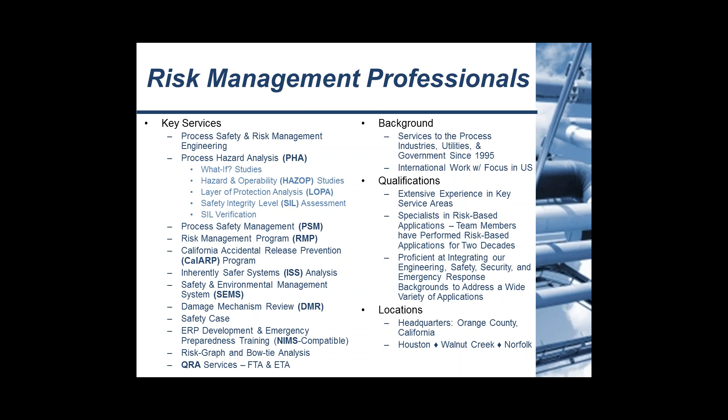Today's webinar will be focused on CalARP, RMP, and PSM common deficiencies and tips. RMP and PSM, as you know, are risk management plans and process safety management programs. CalARP is an example of a state accidental release prevention program, the one that's required in California. Our main presenters are going to be Colin Scholtz and Jordan Schultz, and they will be providing a lot of background and specific tips. So let me introduce the speakers a bit.

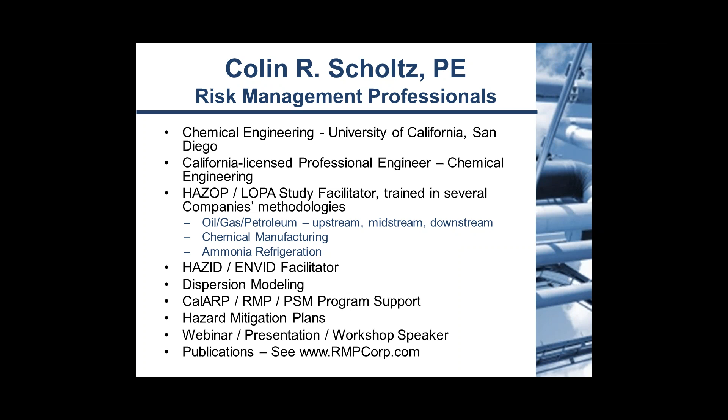Colin's a chemical engineer, licensed professional engineer in chemical engineering in California. He's got a lot of experience with HAZOP and LOPA facilitation on a wide variety of facilities, and has done dispersion modeling as well as many of the other elements of these safety management systems programs. For publications, just see our website. Colin has joined me at the Global Congress on Process Safety before, and has written numerous papers, and one of the ones on operating procedures is downloadable if desired.

Jordan is also a chemical engineer, has experience facilitating HAZOP and LOPA studies for a wide variety of facilities, also has background in dispersion modeling and the other program elements of CalARP, RMP, and PSM. Also has done a number of publications, and those can also be downloaded from our website.

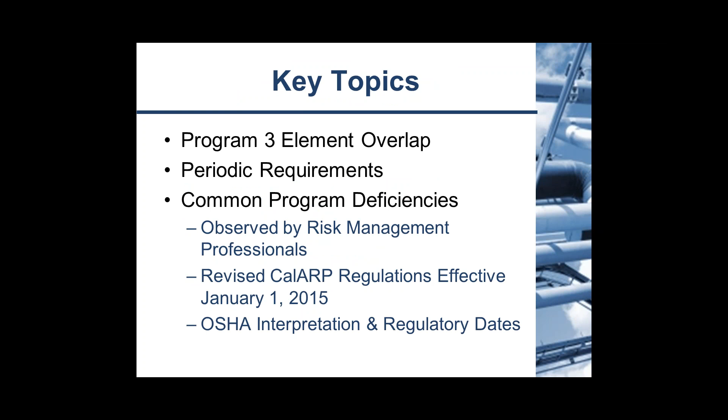So without further ado, I'd like to introduce the topics. We'll start with the overlap of the different programs, periodic requirements, and then launch into various program deficiencies, things that you want to watch out for, things that trip up a lot of folks, things that we've observed, and also things that are changing with the new regulations and some OSHA interpretations that have come out. So at this point, I'd like to turn it over to our first speaker, Colin Scholtz, and he'll start talking about program overlap.

Thank you, Steve. How's my audio coming through? All right, good morning, everyone.

As Steve mentioned, we're going to quickly start out with some of the prevention program overlap. Just a quick overview on that, and then we'll dive into the meat of our discussion this morning regarding common deficiencies of the programs that Risk Management Professionals has seen. Jordan and I will both be speaking on that, so we'll switch about halfway through.

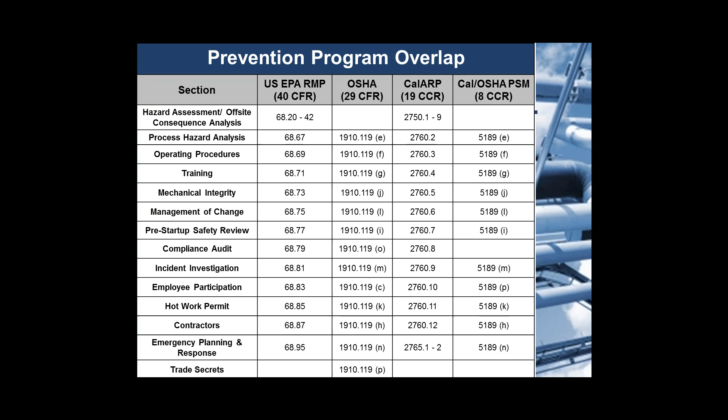And just moving on into the periodic requirements. These programs are living, breathing programs. Facilities have to do a lot of ongoing things in order to comply with the regulations, but there are a couple milestones that we want to call out specifically. There's an annual review and update of operating procedures. We'll talk more about that when we talk about the common deficiencies that we see with operating procedures, but in summary, a facility's procedures have to be reviewed and certified to be accurate every year.

Moving on to the 3-year cycle, we have refresher training for employees and compliance audits. And compliance audits are not the same thing as a regulatory inspection. This is a formal audit done on the facility and its implementation of its CalARP or RMP or PSM program. Something important to note is that this does not have to be an external audit. It can be an internal audit by someone within your organization. The key point there is just to ensure that it's someone who's qualified to perform the audit, and that they don't have any major conflicts of interest on that.

On the 5-year cycle, we have the CalARP and RMP submittal. Every 5 years, at least every 5 years, facilities are required to submit some information, including a summary of their prevention programs and a couple other things to the administering agency or the EPA for CalARP and RMP. OSHA does not have a submittal requirement currently. This is, again, just for EPA and the state of California.

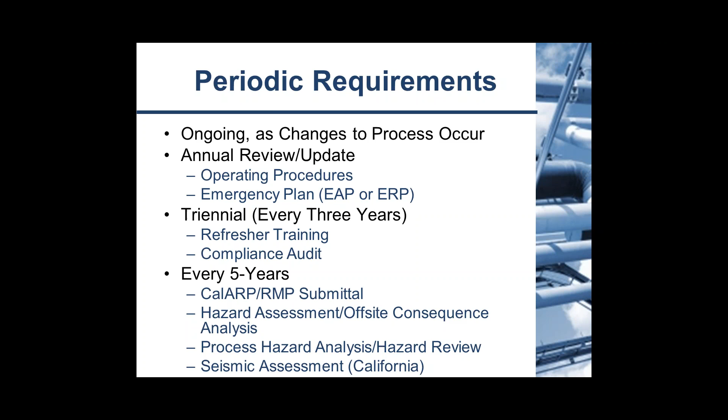Okay, as Steve mentioned in the beginning, we're going to dive into the program deficiencies, and these are mainly observed by us when we conduct compliance audits on facilities or when we're just interfacing with counterparts in industry, working on general program support or PHAs or development of procedures, etc. And it also comes from interfacing with regulatory agencies, either from being on site during inspections or just general discourse as we try and figure out the best way to comply with these regulations.

We're also going to tangentially touch upon some of the new CalARP regulations that went into effect January 1st of this year. In case you guys didn't know that, give us a call afterwards, but yes, the CalARP regulations did change slightly. So we're going to talk about a couple of those minor issues as part of this presentation. However, for more detailed information, you can refer to our website. We have a previous webinar on those changes, and you can also, again, give us a call.

So we're going to start out with the submittal element. Again, this is required to be done at least every 5 years. That's a long time, and I can't tell you, it happens a lot where facilities call us and have their submittal due in a week or two, and it's not impossible to meet that deadline. However, we do want to stress that facilities have 5 years to meet this deadline, and so we really suggest that you allocate your resources accordingly and set up a timeline in order to complete that on time.

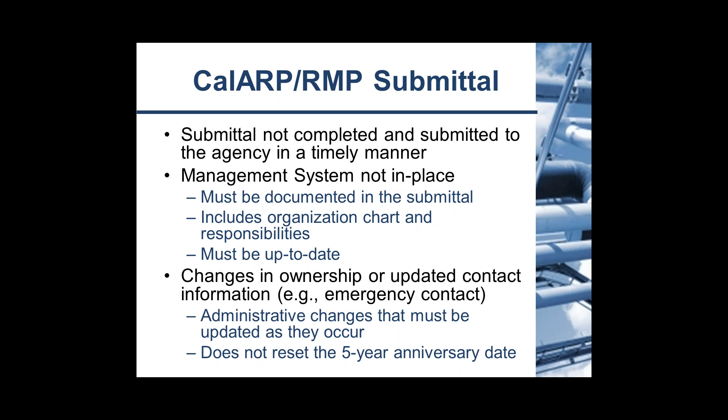It's happened a decent amount of times when we go in to do a 5-year update and are reviewing the facility's emergency contact information on file with the EPA or the AA, and the emergency contact information might be 2 years out of date. And as a heads up, if you're in that situation, you are currently not in compliance with the regulations and are open to potential citations there.

So the hazard assessment, again, is solely a CalARP and RMP portion. It's not an OSHA requirement. And it's comprised of the off-site consequence analysis, or OCA, which is the worst case and alternative release scenarios. And it also includes the 5-year accident history element. Most of the facilities that we deal with have not had any CalARP or RMP applicable releases, so as a result, the hazard assessment is often referred to as the OCA.

The big issues that we see here are lack of clear documentation on the scenarios and how facilities came to those calculations for calculating the distance to endpoint or the quantity released. The more documentation you can have here, the better, just outlining your thought process and how facilities came to that information. On the revalidation side, this has to be updated at least every 5 years. And we have seen some facilities that are static and do not change a lot.

And so in 2010, they did some modeling where they used their largest storage vessel, calculated a radius of impact for that worst case release scenario using RMP Comp, and then plugged that value into some sort of population receptor program like MARPLOT, for example, and came up with a population for that. And then in 2015, when it's time to revalidate it, we've seen facilities just take a look at the calculations, see that nothing has changed in the process, and therefore rubber stamp it and say it's good to go.

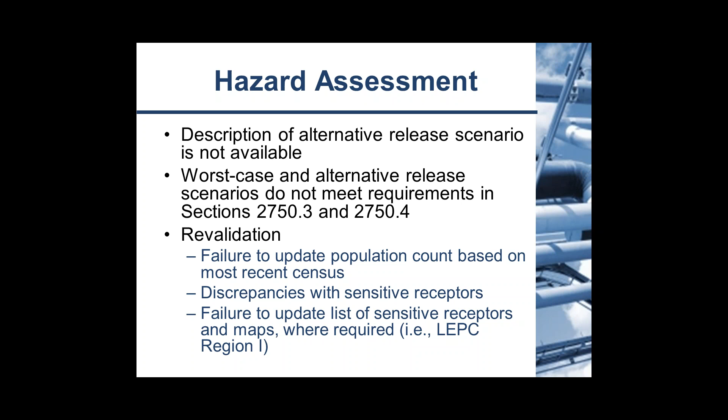The process safety information, this is a very comprehensive set of documentation on a lot of the core technical information at your facility. This includes things like your P&IDs, the codes and standards the facility was designed and built to, design basis for the relief system, specification sheets on components and equipment and valves, etc., instrumentation. And the issue that we see a lot is most facilities are not static. Static facilities are ones who construct their facility and then nothing ever changes. These are generally simpler processes and don't have a lot going on.

However, for more complex processes or those facilities that work in dynamic environments where changes are constantly being made, optimization is performed, etc., those should all trigger MOCs, which then have to ensure that your PSI is updated. And we really see a lot of facilities that struggle with keeping their PSI updated based on the changes that happen out in the field. And the regulations require that your PSI accurately reflect what's out in the field.

And some examples would be like if a facility does an MOC to change some piping configuration or add a vessel or something like that, then if they do a good job on their MOC, they might attach the supporting information like redlined P&IDs or revised operating procedures to their MOC log, but a lot of times that information never makes it back into the master or controlled PSI.

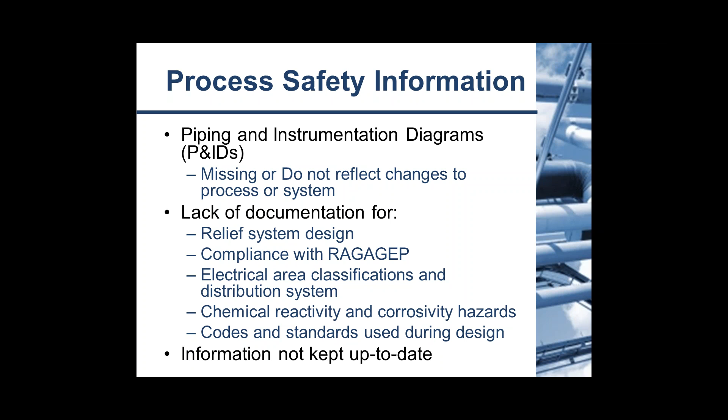And even though this could be true for chemicals, the SDS doesn't address corrosivity because the chemical is not corrosive. If it doesn't say that anywhere, a regulator is going to have their eyebrows raised because you're not documenting that you've thought about it and that you've looked into it. And as you'll see, which is a common thread in this, you don't document something and there's no proof that you've actually considered it or done it.

Moving on to the PHA, again, this is done at least every 5 years unless some major changes trigger an update. We'll start right out. The regulations are clear in defining that personnel with knowledge and experience in engineering and operations must be present, and also someone with knowledge in the specific methodology being used. There have been instances where PHAs are conducted only with design engineers present, and the potential issue with that is there's no one with an operations background, and so that's potentially a violation of the regulation for an operating facility.

Also, the PHA team not documented. We've seen a handful of PHA reports that look very good, but they don't document the team that was present. And so without having that documentation, there's no way to know if there was someone with experience in engineering and operations present, which potentially opens up facilities to some issues.

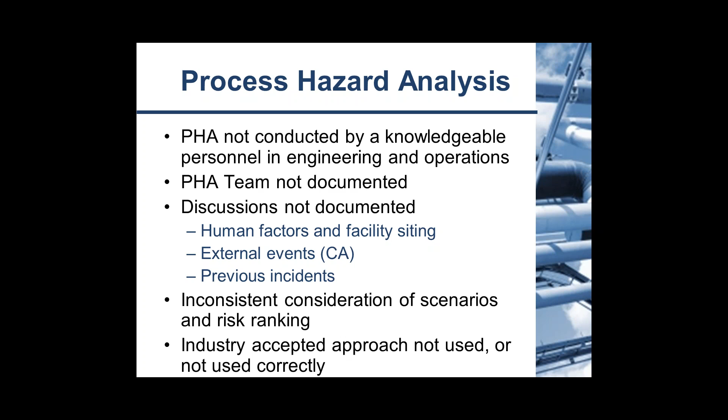However, the big item that I want to touch upon for PHAs is recommendations not closed in a timely manner. You'll see this in bold and in red, and you'll see a couple of these throughout the presentation this morning, and you'll definitely realize that it's repeated for a purpose. This is a very big ticket item that auditors love to come in and look at whenever they get to the PHA. First thing they ask for is always, what's the status of recommendations from the last one?

A change from the 2015 CalARP amendments is they now specify a time frame that recommendations have to be completed, which is within 2.5 years or during the next turnaround. You can deviate from that if you have an agreed upon timeline with the AA, but again, that has to be documented. A number of times when we come in and do 5-year revalidations on PHAs, we'll look at the recommendations made during the last PHA, and a decent amount of time we start asking questions. Was this recommendation done? What documentation do you have on it? And a lot of times the answer is no.

We end up having to close those recommendations on site as part of our PHA. Technically, facilities that are in that situation are deficient because they're not addressing their recommendations in a timely manner. The whole point of making a recommendation in a PHA is to close some sort of safety gap. So if you're not doing that, A, you're opening yourself up to regulatory citations, and then B, you are defeating the purpose of doing a PHA and making recommendations in the first place.

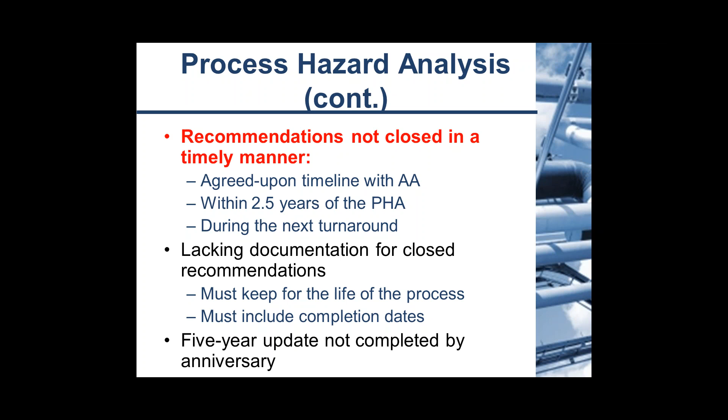Secondly, and I know Jordan's going to talk a little bit more about this, is lacking documentation for closed recommendations. It's not enough to do a recommendation and just be done with it in the field. You have to have documentation showing so-and-so completed this recommendation. This is how they completed that recommendation. It was signed off on this date. Again, as I mentioned earlier, if you don't document it, then there's no proof that it ever happened.

Operating procedures. As I mentioned in the beginning, operating procedures for Program 3 and PSM facilities have a requirement for an annual review and certification to be performed. Again, this is another big thing that auditors love to come in, and as soon as they get to the operating procedures element, they'll ask the facility, show me your annual certification for the past several years. And that's something very easy for an auditor to come upon, and if it hasn't been done for a year or two, then that's a potential citation right there.

Another item that we want to point out is phases of operation not listed. The regulations are specific in requiring that the operating procedures address different modes of operation, such as normal startup, normal shutdown, normal operations, temporary operations, etc. A lot of small facilities don't have any temporary operations, so they just kind of leave that blank.

But that kind of raises the eyebrow of an auditor, because it's not documented that we thought about it. Do we have temporary operations? No, we don't. It's okay to put there are no temporary operations for this process. Really what auditors are looking for is to ensure that facilities have reviewed all the different modes of operation and have thought about them and assigned procedures to fit those.

And the last big thing that I want to touch upon here is operating limits and consequences of deviation. Operating limits are kind of tied back to the PSI. This information typically includes safe process parameters for the process to operate in. So that would be things like pressure, temperature, flow, etc. The operating procedures have to address consequences of deviation if that process deviates from those operating limits.

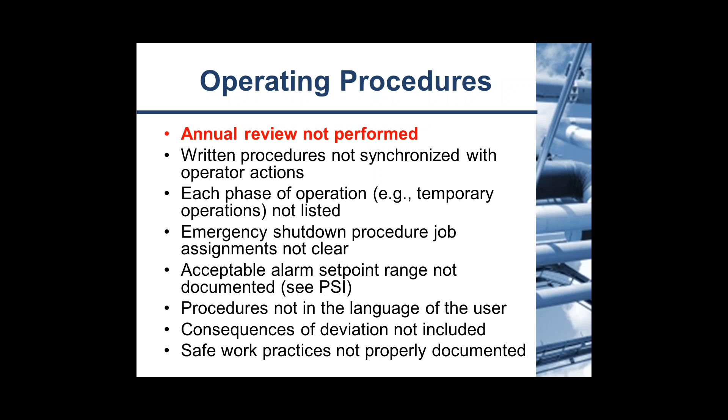I'm going to wrap up my portion this morning with a quick discussion on training. The regulations are clear that initial training has to be provided to every employee that works on or near the covered process, and that refresher training must be completed at least every 3 years. A lot of facilities do refresher training more often than 3 years, but again, the requirement is just 3 years.

The one thing that we see a lot of is just poor documentation on training, which we understand is difficult for facilities, because there's a number of different trainings that go on at facilities that's not specific to CalARP and RMP and PSM. There's a lot of other stuff that they have to maintain records on.

However, the regulations are explicit in the documentation that's required for this training, and that's things like the name of the employee being trained, the name of the trainer, the date the training took place, and most importantly, the means used to verify that the employee understood the training. A lot of times that last item is left out, and we just see training records saying so-and-so was trained by this trainer on this date.

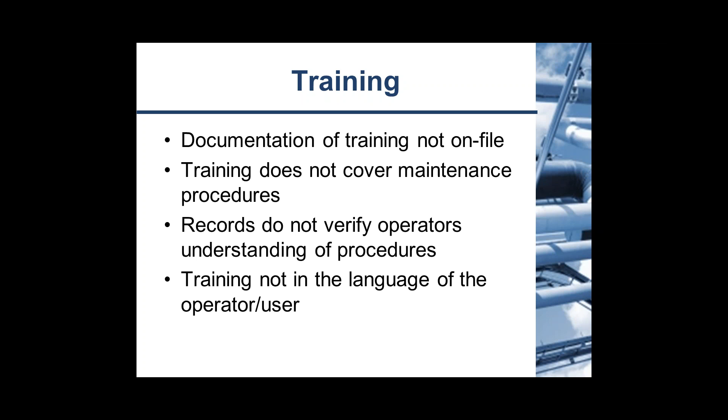And the problem then there is that it doesn't show how the trainer was able to validate that the employee understood the training. This could be things like written tests or oral exams or just demonstrations showing that the employee is able to demonstrate to the trainer that he or she understood the training. However, again, you have to document it. Documentation is the key here.

So with that, I'm going to turn it over to Jordan to continue on.

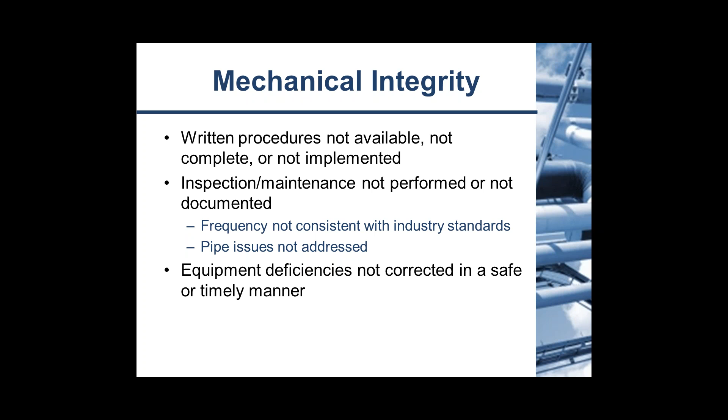Piping issues are also oftentimes not addressed. Making sure that you're looking at wall thickness, like Colin had talked about earlier, in both vessels and piping is very fundamental in making sure that you maintain the integrity of your system. And as part of these inspections, sometimes you're going to note equipment deficiencies. Instrumentation might not be working, or you're noticing a leak in a flange. If you're not documenting that, but also not correcting it in a safe or timely manner, that's a deficiency. Obviously, you're noting an unsafe condition, both from a regulatory compliance standpoint as well as a safety aspect. This is not the ideal way of going about it.

Continuing on with mechanical integrity, making sure that you're documenting your preventative maintenance schedule with your contractor. It sounds pretty simple. However, a lot of times, especially in certain industries like ammonia refrigeration, a lot of the maintenance work is being done by the contractor. They're very knowledgeable in the process, but you should have at least a log sheet saying your contractor is going to come out on a biweekly, monthly basis, however it is, and that they're going to do these items, and then having some form of verifying that these items are done.

Contractors are used to this. They're very good to work with. They'll help you roll these things out, but you need to be making sure that you're not only documenting the maintenance that your own employees are doing, but also the contractors. Quality assurance plan not being in place. This is another one. Just making sure that not only is this mechanical integrity occurring, but also that it's being done correctly. And sufficient information not being available for piping and equipment to understand the hazards.

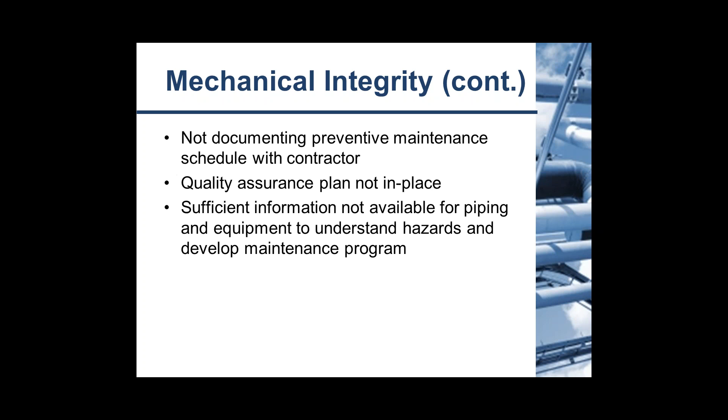Older systems, this can oftentimes be a problem. You might not still have the O&M manuals for certain equipment, so it's very difficult to gauge what the frequencies of inspections are that would be appropriate. If you don't have that information, it can be very difficult, obviously, as you don't know if you need to be doing it more frequently because of the differences in certain pieces of equipment.

The management of change, MOC, procedure. This is a procedure that's very simple from a regulatory standpoint, but it's very difficult to maintain for certain facilities, especially if there's a lot of change going on. The first one would be obviously that the procedure isn't being used or not being used correctly. As part of that documentation, you need to be making sure that you're looking at what exactly you are changing and how this affects how the process works and your personnel safety. As part of that, when you change, you need to be changing your prevention program documentation. If you're not updating this to reflect changes, essentially your program is becoming outdated. It's supposed to be an evergreen program where you're changing things frequently.

The management of change is obviously triggered by a not-in-kind change, so at minimum you are changing your PSI. Oftentimes, this is also going to affect your operating procedures and maintenance. So you need to be making sure this is the way of identifying what is changing and how things need to be implemented. Another big problem is personnel not adequately notified of the change. As part of MOC procedures, you need to be making sure you're training affected personnel on the change. If it's just an email, oftentimes you need to be doing something more like brief training, or at least making sure that they're comfortable with the change, they know what's happened, and how that affects operations.

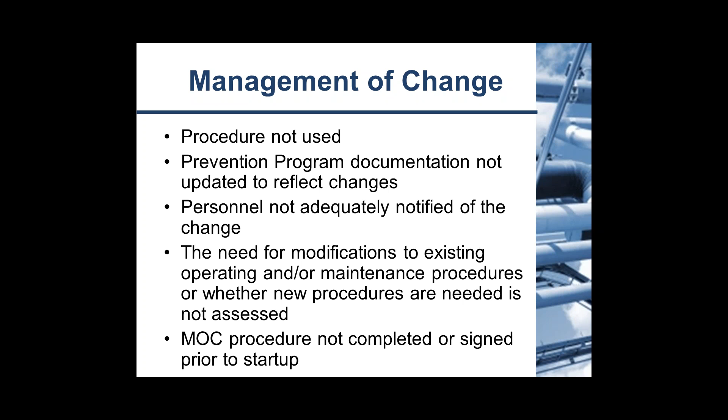And MOC procedures are not completed or signed prior to startup. MOC is your way of catching any kind of safety hazards or changes to the way you're operating the system prior to implementing the change. Obviously, if the system is already changed and you're starting back up and you haven't closed out your MOC, it is defeating the spirit of what MOC was put in place for. You haven't made sure that all of your safety hazards or all the changes necessary have occurred prior to starting up.

Pre-startup safety review, or PSSR. It's similar to the procedure not being documented. It's a lot like MOC in that regard, or not keeping the documentation on file, or just going ahead and completing it following the implementation. Your PSSR is oftentimes a checklist that you're going to use to make sure, hey, these are the items we've defined in the MOC that have changed and need updating.

Your PSSR is that final verification check to make sure that, yeah, everything has been done, we're safe to start up. So obviously if you haven't got that completed prior to startup, it's kind of like the MOC. You've identified hazards or problems, but you haven't done it before starting up, so it's sort of in vain. And if the PSSR is not documented or conducted independently of the MOC, like I've been saying, this PSSR is there to be the final verification of your MOC being implemented. So if you're doing them all at once, you're not really encapsulating the spirit of what PSSR was designed for.

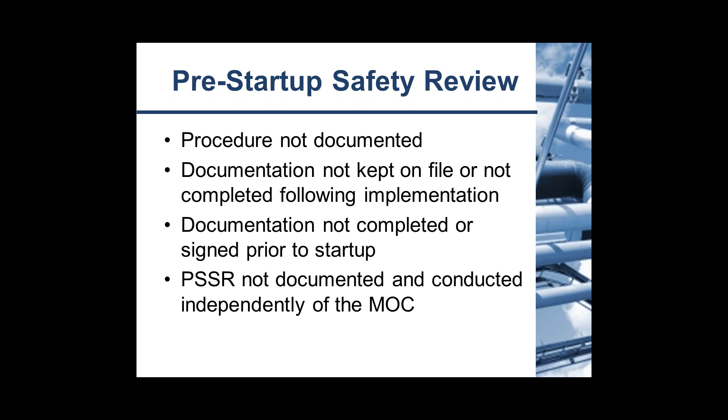Compliance audit that's not completed by the anniversary date. This is a very common one. A lot of times you're thinking about that 5-year update with a PHA and your hazard assessment, which is very important. And then compliance audits can oftentimes slip under the radar. But these are often much more out of compliance than your 5-year update materials.

No documentation is included regarding your audit scope, methods used, or findings. You can't just say that, yeah, we reviewed the regulations, reviewed our program, and we felt comfortable. It needs to have a front-end report stating exactly how you reviewed this for compliance, who was involved, what was found, how we did it, and most importantly, once again, the recommendations. These were our deficiencies. Here's how we're going to close them.

Program implementation not verified with facility personnel. This is another one where you oftentimes will run into some issues. Involve the facility. You're going to have to ask some interview questions. Go ahead and look around. Don't just look at the paperwork. Actually make sure you're looking at some of the extra information behind it.

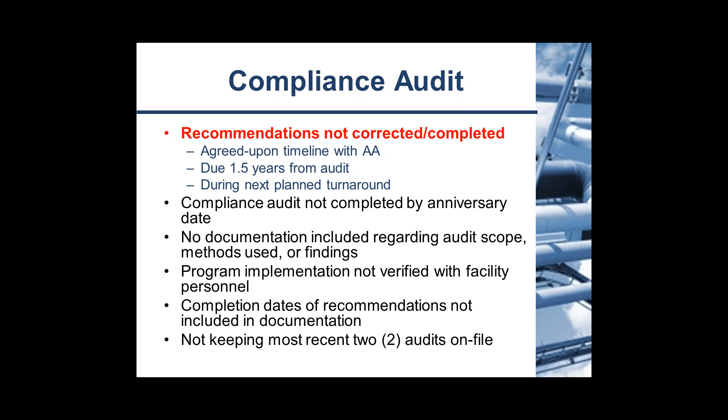Incident investigation, yet again we have the red bold comment on no follow through on recommendations. We'll touch on it again just in a bit. It's got similar requirements on closure as does compliance auditing. You can agree on a timeline with the administering agency. If you don't, these are going to be due 1.5 years following the investigation completion or 2 years after the date of the incident. You don't have any choice. It has to be whichever one of those 2 dates is earlier. And also, you can go ahead and do it during the next planned turnaround. That has to be occurring within the 1.5 year margin, obviously.

Investigation not initiated within 48 hours of the incident. Questions often arise on what constitutes not initiating. That isn't reporting, I guess, would be a question that I've often seen. It's when you convene that team, and then you start the process of trying to figure out what happened and what you can do to fix it.

Findings are not shared with affected personnel. A lot of times people do incident investigations and they do them correctly. However, you're investigating the incident to figure out what went wrong, to share that information with employees and make sure it doesn't occur again. If you're not circulating the report amongst the affected personnel and keeping them involved in the investigation, they may not know what the cause is and it could happen again.

Required information not documented during the investigation or in the report. It's quite well spelled out in most of the regulations regarding what information they want. Make sure that it's all documented. No investigation or documentation of near misses. The regulations explicitly state a significant release or something that had the potential for a significant release or personnel issue as the definition of a near miss, and it needs to be documented.

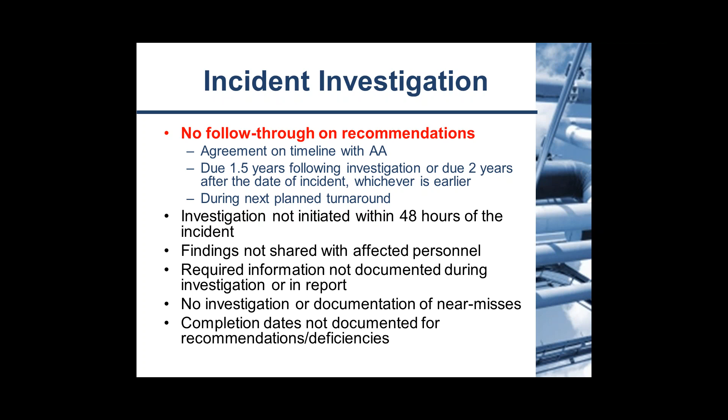Employee participation. Written plan not documented and or shared with the facility personnel. You're going to be involving your employees in this process of developing and maintaining these programs. However, there should be, kind of like Colin touched on with management systems, delineated tasks where certain personnel are doing other things, and you need to make sure that you get an eclectic and clear look. This program is made for keeping maintenance, operations, engineers, and other plant personnel all safe. So you want to make sure that you get as much knowledge and insight from the different groups as you possibly can.

Personnel involved with the covered process operations are not aware of where the CalARP, RMP, or PSM documentation and procedures are located. One of my favorite questions to ask during compliance audits is talking to those operators, just grabbing somebody random and saying, hey, where is your CalARP, RMP, or PSM binder? Where's the documentation, or where can I find this? It's shocking, or depending on how close you are to the program, not shocking at all, how often some of these operators or maintenance personnel may not know where that is, or even what you're talking about.

Personnel not involved with program development. You want to make sure, once again, that you're involving as many people as possible. Granted, I'm not condoning that you put 45 people into a PHA, but you want to make sure that you're at least getting a knowledge base that has everything included in it when you're doing some of these items. And documentation not in the language of the operator or user.

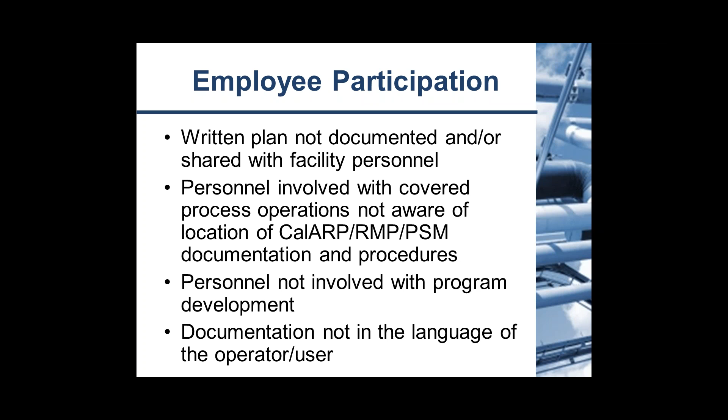If they can't read it or understand or comprehend it, you're really not doing anything. You've just got a very large stack of papers if it's not able to be digested.

Hot work permit. Personnel not being trained or knowledgeable on the procedures. This goes back to training and everything, where you need to make sure that if people are doing hot work on the system, they know exactly what they need to be doing. Records are not documented or not kept on file. You have both the training records and your hot work permits, making sure that you're keeping those documented correctly and you're filing where it's needed.

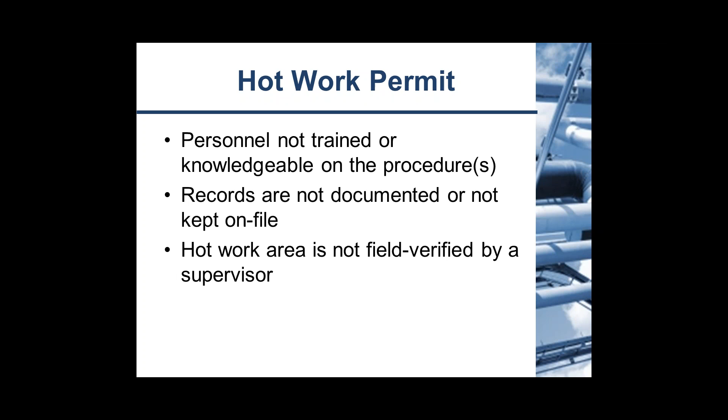Or hot work area is not field verified by the supervisor. This is another one that's very common. Supervisors can be very busy, especially at some larger facilities. However, they need to make sure that they are spot checking this, as hot work oftentimes can lead to unsafe conditions.

Contractors. This item comes up often. I've had several calls after the fact on some of these issues. No documentation regarding contractor training or procedures for conducting work and maintenance on the covered process. It's not very explicitly spelled out in the regulation, but you need to treat a contractor similar to an employee while they're on your facility. You need to make sure that you have clear documentation that states this person that's doing the work understands what he's supposed to be doing, the hazards involved, and things like that.

Also, they need to have procedures. Just like your company would have maintenance or operating procedures written out, they should have written or trained on these operating procedures and maintenance procedures for the covered process. As part of the general safety, lack of contractor or visitor safety training. They should know what's on site. They should also be relatively familiar with your emergency plans. They should know if they hear an alarm, what that alarm means, and where to go.

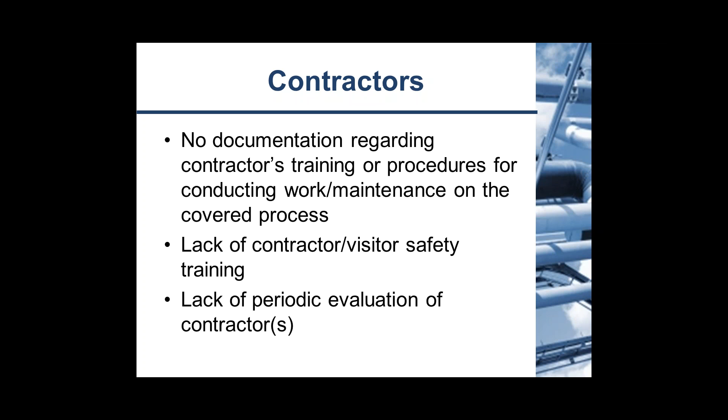And then lack of a periodic evaluation of contractors. All these regulations ask that you do safety audits and make sure that they're performing in line with what your safety culture would be.

Emergency planning and response. One of the biggest ones, and this comes up a lot, is emergency response plans versus emergency action plans. Not knowing the difference is obviously a big issue. Emergency response plan, the key word in that being response. Your facility is going to be putting on your protective PPE, you're putting on everything, and you're going to try and fix this problem.

Whereas an emergency action plan, you'll take some basic actions while you're egressing from the situation, hit your e-stop buttons, make sure that people are safe, but you're going to the muster points and allowing the fire department or hazmat team, whoever is your responder in the area, to deal with it as they do. Not having the correct plan in place. Everyone wants to think the emergency response plans are easy, but it's very difficult, and if you're not going to respond, you want to make sure that you have an emergency action plan. They have different requirements, and the procedures are different.

Also not meeting emergency response requirements by the other agencies. Making sure that you're coordinating is the fundamental issue, especially with emergency action plans. Your responders should know what's on site and how to deal with that, which means you need to coordinate with those guys, at least on an annual basis.

And another thing, as part of that annual basis, go ahead and do an annual review. The regulations don't explicitly require this. However, it is the suggested frequency by OSHA, and as such, industry has generally accepted that as well. I would suggest going about that. You may be able to argue one way or the other, but it's probably the industry best practice.

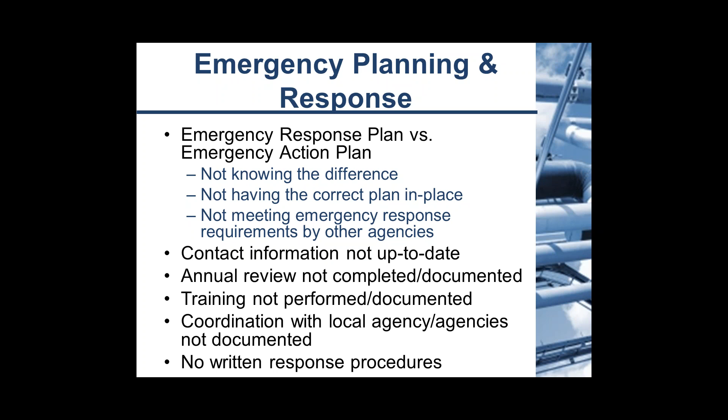Also, you need to have that response plan written down. People ask about where these things should be located. Oftentimes, we've said that the intranet on the company side is a good place to do it. It's very easily accessible, and it makes controlling the document much easier. But there are certain areas, say remote operator sheds or other places, where you'd want to have a hard copy. The more copies you print off, the more difficult it is to control, but you also don't want to be leaving these things out just because you want to keep one controlled copy.

Most common program-wide deficiency: recommendation follow-up. You've seen it in bold quite a few times throughout the webinar. Regarding recommendation follow-up, things we've found that work the best are having an actionability type of meeting. We're going to look at whatever your PHA team, your compliance auditing team, or incident investigation team have recommended, and then bring everyone together, especially the movers and shakers that will be in charge of implementing some of this stuff, and go, okay, here's the recommendations we had.

Review and make sure that the wording makes sense with the people that will be actioning these, and then also assign who will be taking care of that recommendation and what the timeline for completing that recommendation should be. It'll also have boxes that give you the completion date and notes for following up on it.

Follow regulatory requirements when it comes down to assigning those completion dates. Obviously, it used to say in a timely manner. Now you have 2.5 years regarding the PHA, and give or take a year and a half on compliance auditing and incident investigation. We've already talked about those specific requirements. You're going to be out of compliance if you assign those to be later.

Document the actions taken to address those recommendations, make sure you're clearly labeling that they're closed, and record that date of completion when it is closed. Colin talked about it earlier. It is oftentimes an issue that we see where, especially if you haven't been doing it very diligently for years, it's very difficult to try and close them out correctly all at once. So people oftentimes just label it closed.

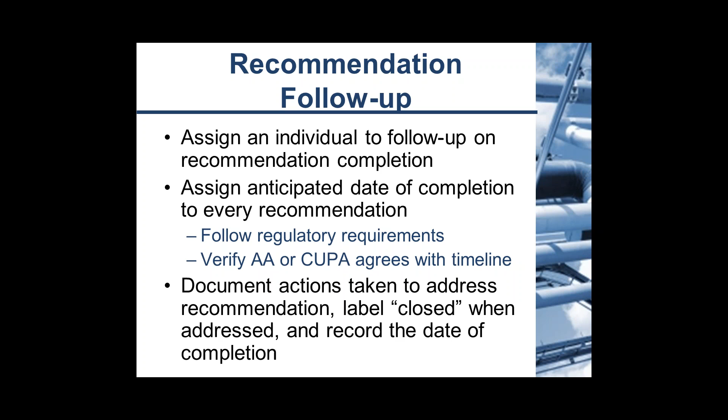The problem with that logic is that if you did a PHA, and let's just say you neglected it and you come back to it 5 years later and you just close it out, you might have done that recommendation. However, if you don't have a date assigned to it that says, yes, we completed it before this timeline ran out, they're going to have to assume that it wasn't done on time. That kind of comes back to this maxim: no documentation equals a deficiency.

Regarding some of the new regulatory updates, OSHA has released some interpretation and enforcement letters in June and July of this year. The first one would be RAGAGEP, or Recognized and Generally Accepted Good Engineering Practices. They let you know how they would like to see you document RAGAGEP. This was an OSHA PSM RFI topic, which would indicate to me that this has been a point of contention for them, so make sure that you read that letter. It's basically telling you how to use industry standards and other things like that to make sure that you're documenting that you are following RAGAGEP.

The retail exemption. This is a pretty big one. Once again, it also comes back to the RFI they've released. Basically, their clarification states that if a facility doesn't fall under the SIC code of 44 or 45, you're not considered a retail facility eligible for the exemption. They initially let that out, and it was supposed to be immediate, but they've now stated that this enforcement is going to start around mid-January of 2016, or 6 months after they released that letter, basically to give facilities the chance to work with OSHA in consultation to make sure that their program levels have changed, that they're compliant, and that they have time to do that rather than scramble all at once.

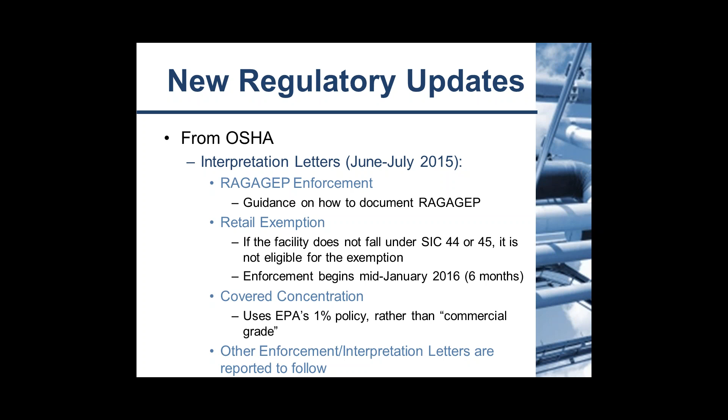In California, Senate Bill 612 has been moving. It gives the CUPA or UPA a general duty clause. Basically, this is something that the EPA RMP already has.

Things they note might not be regulatory explicitly required, but they can go ahead and require other things under the general duty. New mapping requirements: oftentimes LEPCs or other agencies may have specific requirements when it comes to mapping. You're going to have to go through a bureaucratic process to state that this is our policy and then have it written out instead of just kind of word of mouth.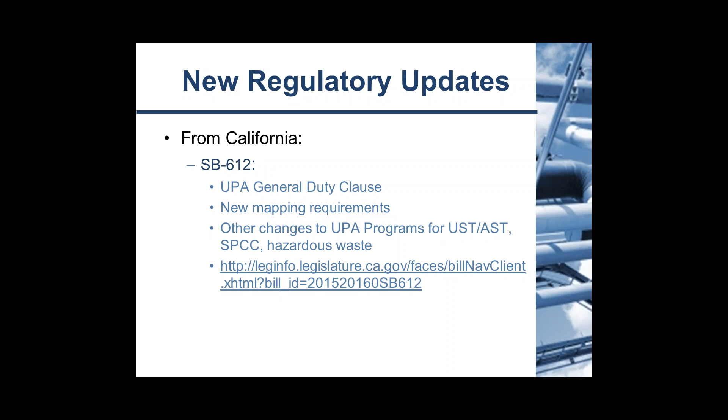They've changed other UPA programs like underground and above ground storage tanks, spill prevention countermeasures, hazardous waste. For more information on that, we went ahead and provided the link. Go ahead and look at that. It'll give you the bill, its progress, etc.

Just a quick status update. CalARP, we've been talking about it. The new amendments took effect January 1st of 2015. There's been some movement towards what they call Program 4. This is going to be explicitly for refineries. NAICS code 32411 is that one. If you aren't 32411, you're not going to have to worry about these elements right away. It's going to be due in early 2016.

CalOSHA is also doing a similar element to Program 4. They started it with 5189.1 or PSM for refineries. Once again, if you're not in that 32411 NAICS code for petroleum refining, it's not going to apply to you, and they're going to be rolling out simultaneously or very close to each other with CalARP and CalOSHA's refinery enforcement specialties.

US EPA is at the notice of proposed rulemaking, should be published soon. They were projecting September 2015. It hasn't come out quite yet, so it'll either be at the end of this month or very shortly after that. They're currently trying to draft the regulations once they've proposed this rulemaking. OSHA is in the Small Business Regulatory Enforcement Fairness Act, or SBREFA panel. They started that in 2015. EPA and OSHA both have two different regulatory models, but they're both moving forward with these RFI topics. They should be drafting regulations soon as well.